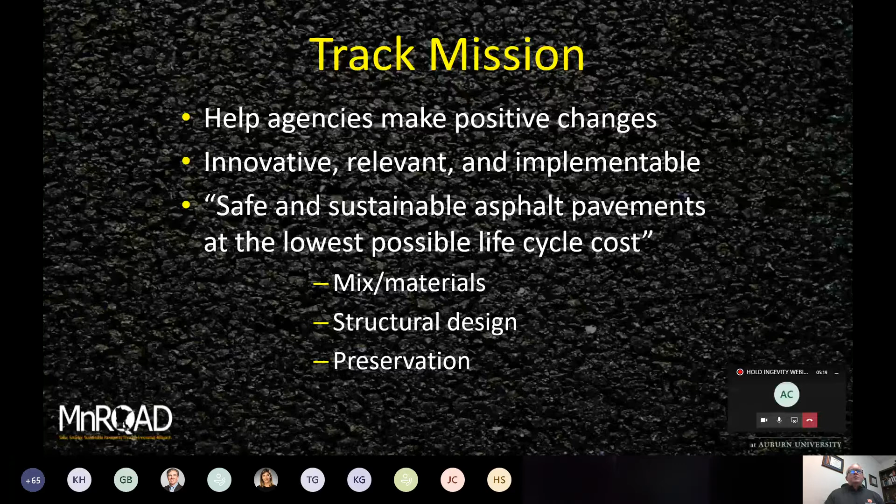That's an all-encompassing thing to say, but to summarize it better, we do research to determine what is the best combination of materials to put in each layer of the pavement structure. If you have the ideal materials in the mix and in the layers, then how much thickness do you need in order to minimize your life cycle cost? And then if you've got the right materials and the right structure, what do you need to do to preserve that? So you build a good house - what's the most cost-effective roof to keep on the house? That essentially is the three ways that we pursue safe and sustainable asphalt pavements at the lowest possible life cycle cost.

This message has resonated with many state DOTs. As Amy said, we've been doing this here at the track - we actually broke ground on the first track in 1998, so we've been doing this a very long time. We've grown from being a track that was primarily a Southeastern Conference track to have a much larger impact. You see a lot of northern states in this sponsor slide. We actually have 24 state DOTs that fund research here at the track in partnership with several different private sector clients.

One of the big reasons why you see a lot of northern states on there, like Wisconsin and Michigan and so forth, is because now we have a strategic partnership with MnROAD in several different areas that I'll go into here in just a minute. So we've grown through the years from 8 states to 24 states, and we're very grateful for our partnership with Minnesota Road Research Project that has made that possible.

Now, Minnesota does a different brand of pavement testing than we do here on the NCAT pavement test track. This type of research is called accelerated pavement testing, where we do accelerated damage. So the idea with this in our 3-year project cycles is to take the middle 2 years and compress a design lifetime of damage, which for us, that's 10 million equivalent single axle loadings, approximately 6 million heavy axle passes.

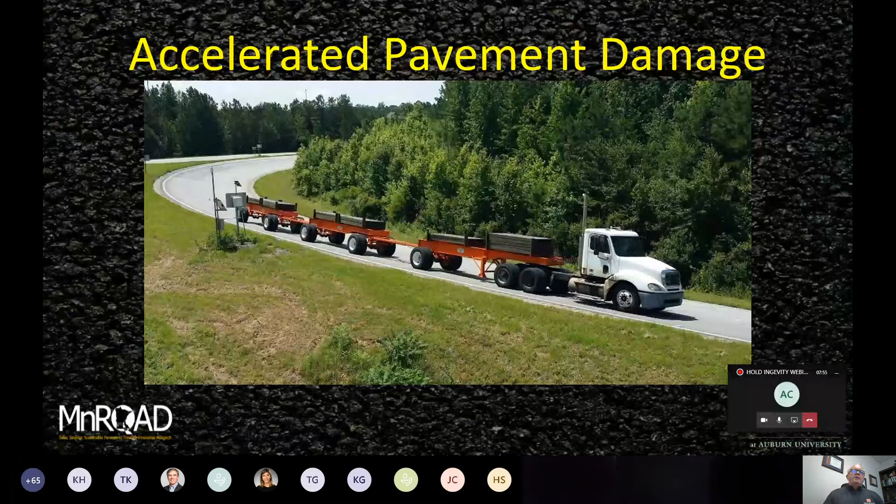The truck you see on this slide is going to do about 400 laps a day. That's what we target - about 200 laps in a primarily AM shift, and then 200 more laps in a PM shift. We run 5 of these trucks at a time. So when we don't have any drivers out and no mechanical problems like flat tires, we run 2,000 laps a day.

The track is 1.7 miles long. The straightaways are approximately a half a mile long. So if you do the math on that and throw in some downtime for drivers missing shifts and some mechanical problems, we run about 750,000 miles a year here on the track.

I think now we've driven over 9 million miles since we first started this research, since our first fleet operations back at the beginning of the 2000 research cycle, our inaugural research cycle. The 2018 track we're running right now is approaching 9 million ESALs, and this is the 7th research cycle. In total, we've done about 69 million ESALs on the track since we started this research, and we actually have 2 test sections still on the track that were installed when we built that first research cycle.

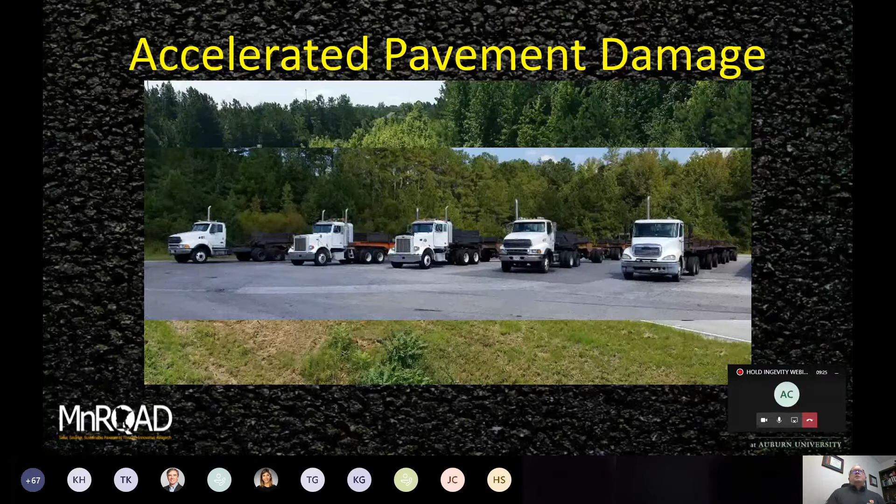So a lot of really successful pavement performance on the track, and a lot of good research for state DOTs with essential cooperation from industry, from material suppliers and equipment manufacturers, and from contractors. We're very proud of that.

Every week we park our trucks and go out on Mondays and do very detailed pavement condition assessments. Here's an example of the type of crack map data that we collect.

This is a big deal to me personally, because at one time with Alabama DOT I worked in research, and it's very difficult to do research on open roadways because of all the confounding factors that can influence the outcomes of the studies. On the test track, the neat thing is all those confounding factors are very controlled. And we can park the trucks and go out and collect this kind of data in a very safe way that doesn't put any of our personnel at risk.

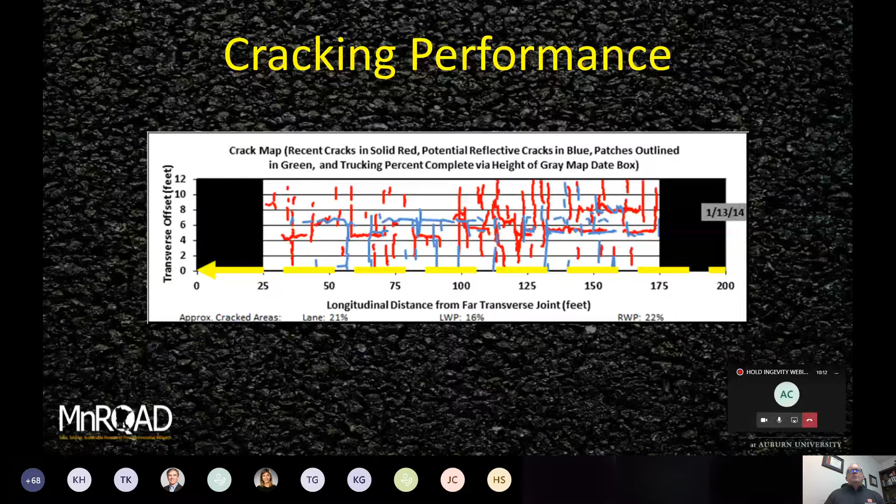So this is just an example of the type of work we've done in the past, where all of the recycle-focused sections outperformed the all-virgin control. We also learned a lot about the need for tack and adjusting what was a specification-ideal rate that we shot in the initial construction of that test section. We actually had to double that rate because of the various layers we had built in this relatively thin pavement.

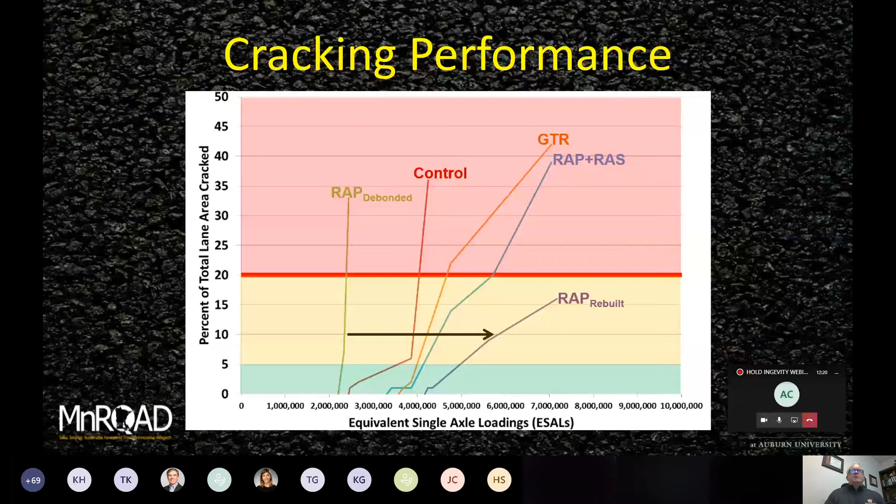So I wanted to give you a feel for what we're studying in 2018 in the current research cycle, and then transition from that with the sections that are going to stay in place for the next cycle, and end up with a focus on the 2021 track that we're going to be building next summer.

In the current research cycle, we have a partnership with the Minnesota Road Research Project. It's a two-part partnership where we're doing research with mix performance testing, specifically cracking tests, fatigue cracking down south, and thermal cracking up north, and then pavement preservation. It's a two-way partnership where they're our subcontractor in the cracking test work, and we're their subcontractor in the preservation experiment, noting that Dr. Adriana Vargas is the PI in preservation.

So the whole objective of the mix performance testing is which tests do the best job in predicting cracking. And we're talking about near surface fatigue cracking down here in our experiment, and then thermal cracking up north at the MnROAD test facility on the mainline bypass.

This is really important because we need to know how to improve balanced mix design outcomes. We've been volumetrically optimizing our mixes for decades, with a long history of success, primarily when we were using all virgin materials. That's not practical — you can't always build with virgin materials. We have to be sustainable with our industry. Our product with asphalt pavements is 100% recyclable, and when you want to use higher percentages of reclaimed and recycled materials, you really need to know how to assess that in the laboratory.

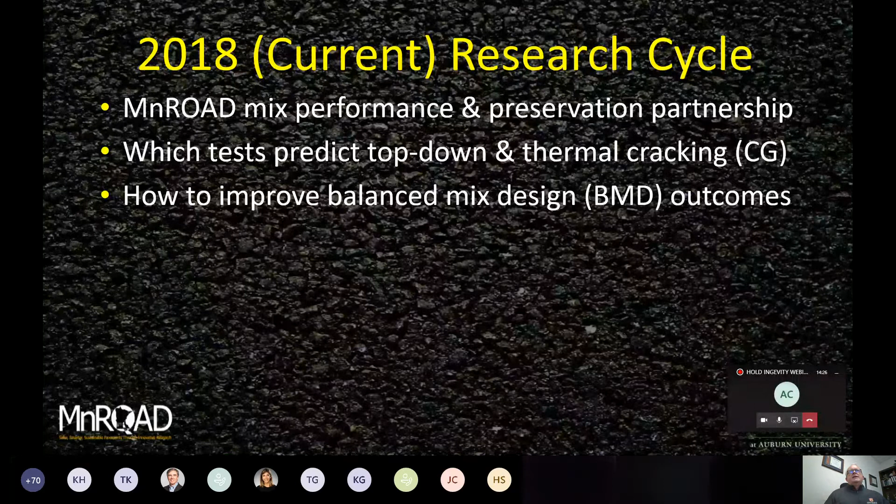That's important for state agencies in order to implement sustainability, but also know that taxpayers are going to get the right kind of value for the investment being made in our roadways. And then contractors need a BMD framework that they can complete their designs inside and build their roadways inside. Part of a BMD framework is mix design approval, but then also construction quality testing.

When we're approving mix designs, there are things we want to look at that we don't have time to look at when we're actually building a roadway, but we need rapid turnaround tests when we're building a roadway so that contractors know if they're complying with the specification. And if they're not, what can they change fairly rapidly at the plant within the same day, within 3 or 4 hours, in order to maintain specification compliance.

A big part of balanced mix design practices or methodologies is what type of aging you're going to use with the mix. You can do short-term aging to simulate what happens when you run mix through an asphalt plant, but cracking performance changes as mix ages, typically over a 4 to 5 year time frame. So we need to assess short-term performance because that's how we're going to be running our quality control tests.

But agencies need to approve mix designs based on long-term benefits, and this is very important for recycling agents, because when you go into the laboratory and do long-term aging of mix, you see that some recycling agents sustain rheological benefits over a long period of time, and some others do not. So they're not all created the same, and it's in the best interest of agencies to consider the effect of long-term aging on the performance of recycling agents.

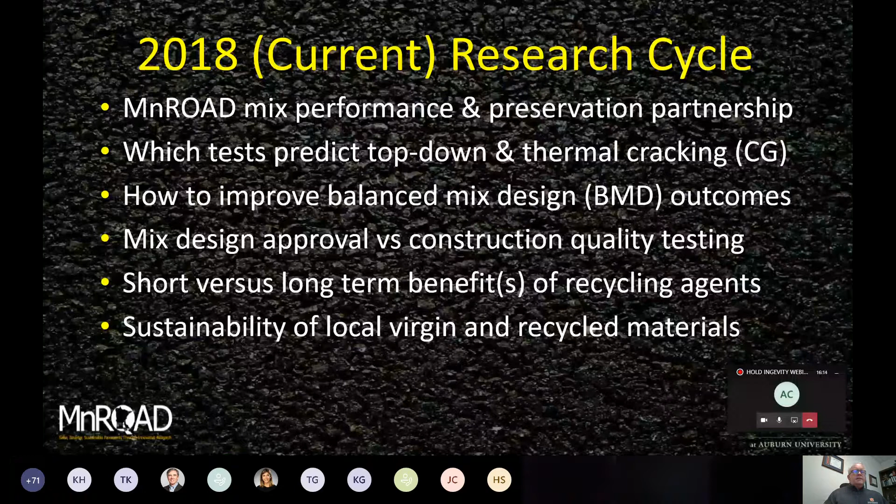Really, this is all about sustainability of our infrastructure. Sustainability for me — I tell people all the time — has three P's: people, planet, and profit. We really have to have all three legs on the sustainability stool in order to have a successful infrastructure program. And we need to make the most we can of local virgin materials and then reclaimed and recycled materials.

If you look at what's happening with quarries all over the country, in some states the number of active quarries is going down, and we're going to have agencies that are going to be really struggling to provide enough virgin material to build and maintain the roads in the manner that we need to provide infrastructure for our constituents.

So we need to smartly use reclaimed and recycled materials in combination with the best locally available virgin materials. Most of the time when we talk about local virgin materials, we're thinking in terms of optimizing recycle content, but a lot of the work we're doing on the track is aimed at maintaining surface friction, since many of our local aggregates, depending on your state jurisdiction, may have a polishing problem, and you only have a handful of sources in your state that provide really good friction numbers.

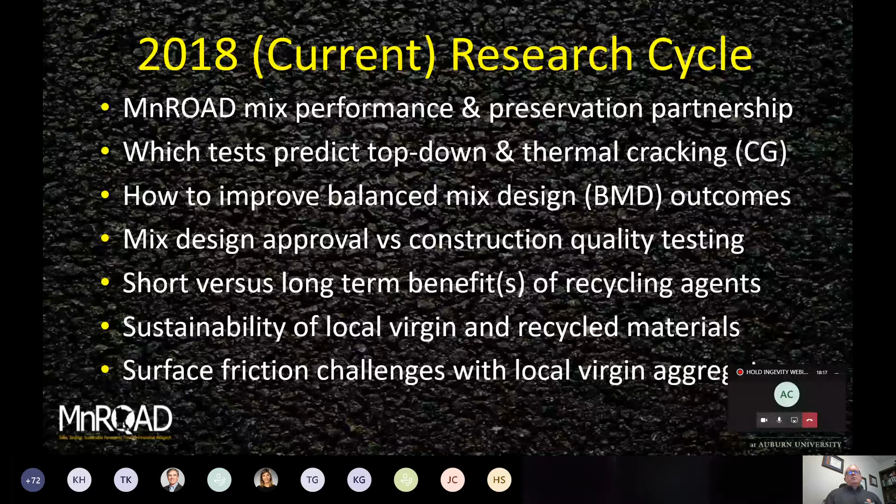So, spending quite a bit of time here talking about this cracking group experiment as part of the partnership we have with Minnesota. We have a list of consensus tests that the DOTs who funded this experiment said they want included. We looked at mix design type lab mix, lab compacted, with just plant simulation aging and then long-term critical aging, and also mix that we actually ran through our plant to build test sections on the NCAT pavement test track, which has gone through plant production aging and that we can do critical aging with.

So we've got 4 different categories of mix that we typically look at with each of these test procedures. The objective of the study is to see which of these match up with the differences we observe out on the NCAT pavement test track. It's a very practical, real world experiment.

The test sections we built for this are relatively thin, so they're bending a lot in response to passing legal loads in our triple trailer trains. But the base layer and binder layer were produced with very fatigue resistant, highly polymer modified binder, so they're not going to crack in the bottom or the middle. What's different about these test sections is the top 1.5 inches, which is made of many different types of mixes set up to have a broad range of expected cracking performance.

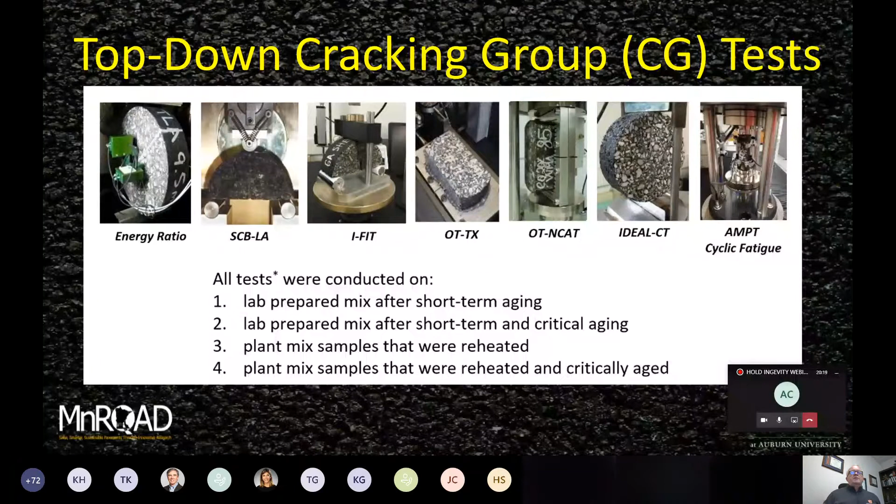So the goal of this study is to see which of these lab tests actually predict the differences we observe on the track. We're doing the same thing up in Minnesota for thermal cracking. It's a very practical experiment, and there's a great product that comes from this for states in the southern United States, the northern United States, or somewhere in the middle where you have both fatigue and thermal cracking considerations.

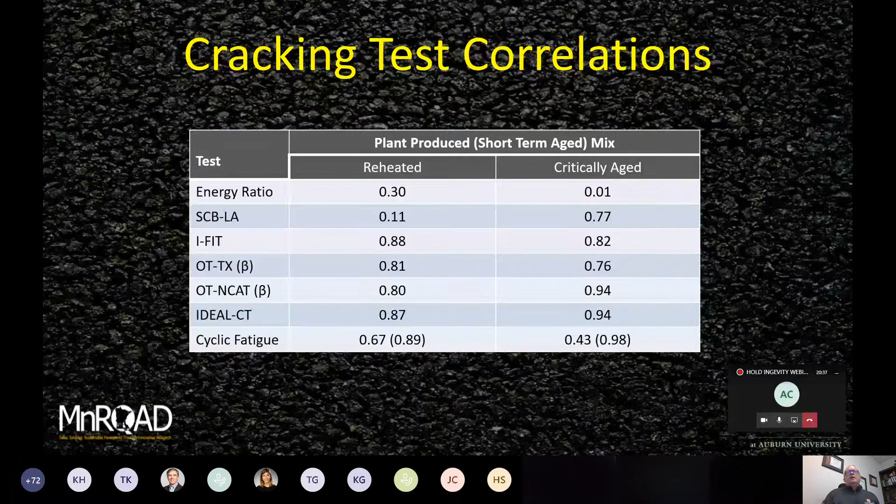So if you look at our correlations, after 8+ million ESALs, if you look at the cracking we're mapping on the track and correlate that with the outcomes of these experiments, what you see is that for states that need to approve mix designs, there's really high correlation, or coefficients of determination, between what we're measuring in the lab and what we're observing on the track. Everything I've highlighted in green represents potentially good options that state DOTs can use to approve contractors' mix designs for cracking performance.

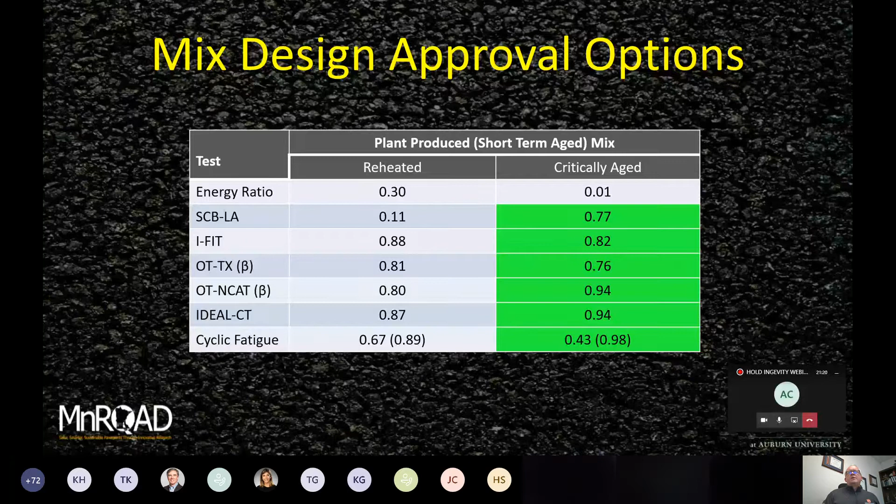Now, the other side of balanced mix design is rutting performance, but we have a lot of really good tools to assess rutting performance of mixes. Our big challenge is cracking performance. So everything I've shaded in green is a reasonable choice to assess and approve a contractor's mix design.

The ideal CT test is a very quick test, and you can turn results around in 3 to 4 hours. So when we do construction or maintenance work on the track, we always test drive ideal CT testing and hot ideal CT testing as a potential quality control tool. I've become more and more convinced over time that this is a great tool for agencies to consider.

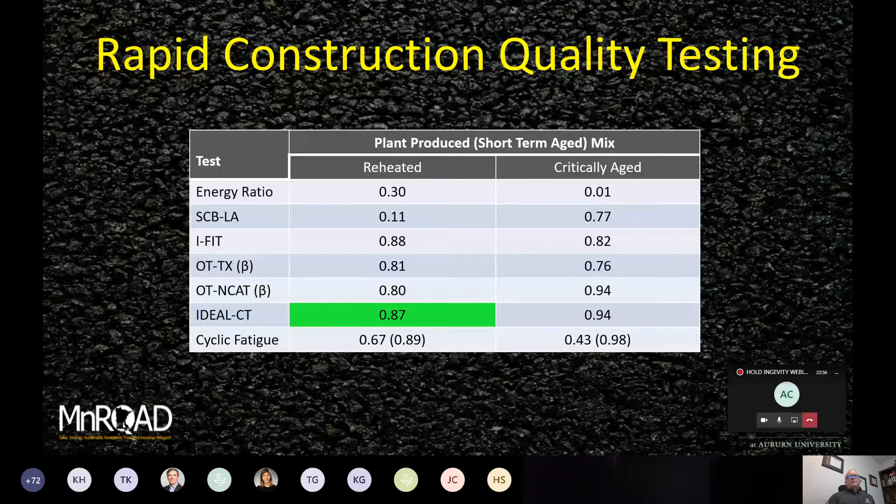For assessing the quality of produced mix. For mix design approval, you've got a lot of options for construction quality testing, where you need 3 to 4 hours of turnaround between the time you pull a sample and the time you get a number that can be compared to specification compliance. In my opinion, that's a short list, and it's ideal CT testing that correlates well with what we see on the track. That's without any kind of critical aging - that's just with plant aging.

So then what happens when you take that plant mix that you can test rapidly during construction, and then subject it to critical aging? What's the relationship between just plant aged material and the additional critically aged material? For us, critical aging is 8 hours of aging loose mix in a pan at 275 degrees Fahrenheit, and we know chemically that this induces a change in the mix that is chemically very similar to what happens with age hardening and oxidation on a roadway for 4 to 5 years.

That's on the NCAT track, the southern half of our experiment. If you look at the northern half of the experiment, these are mixes that we built at the MnROAD test facility. We placed these mixes on the NCAT track in 2015, and on the MnROAD mainline bypass in 2016, and we've been monitoring cracking performance on these ever since under the traffic levels that we see. At MnROAD, the critically aged mix is about 45% of just the plant aged mix.

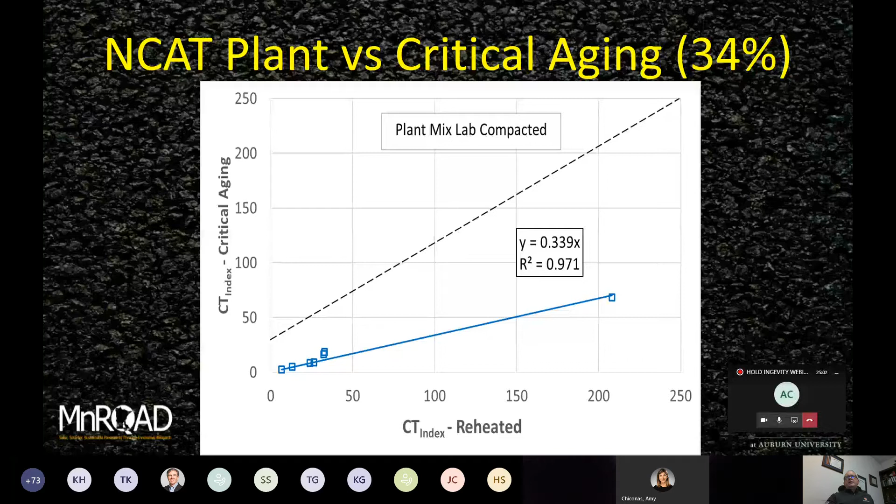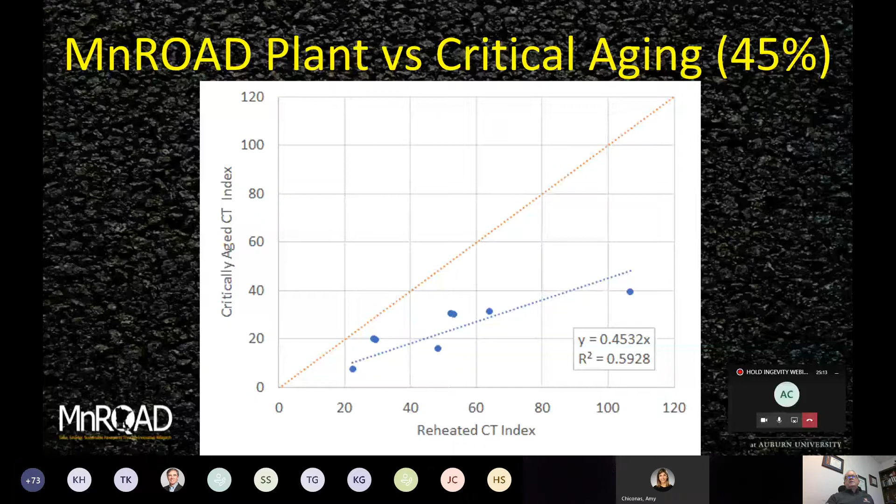So again, regrouping a little bit here: at NCAT, it's about 34%. At MnROAD, it's about 45%. You've got different binders, different RAP, a lot of different things that are affecting this, but it's kind of interesting to see how that changed.

This is data from another experiment that we did, for a state DOT where we tested some of their mix on active state projects. What we saw here was that critically aged mix was about 57% of just the plant aged material. So I think the takeaway from this is that the quality of the residual binder that's in the RAP plays into this, and also the virgin binder grade that's added to the mix when it's produced plays into that. So you're going to get a different reduction in ideal CT as a result of critical aging, depending on where the RAP comes from, the state the mix is being produced in, and whether or not you include recycling agents, and how well those recycling agents stand up to the aging process.

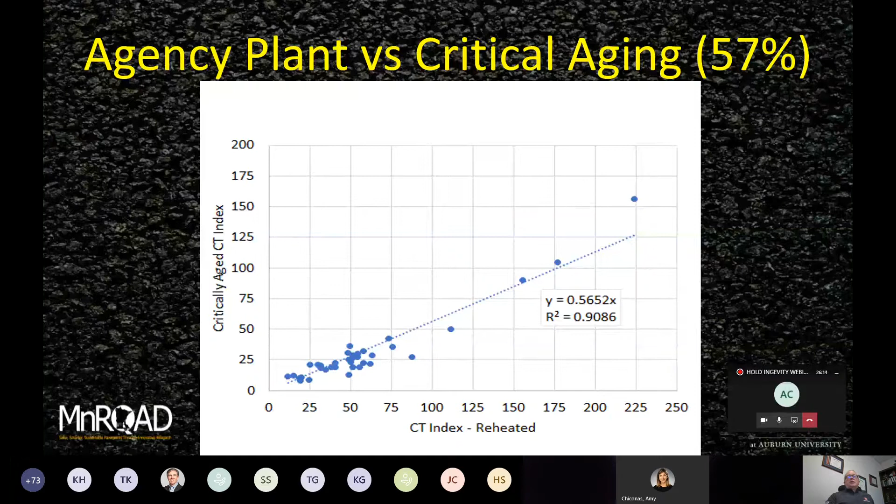So there's a lot for us to think about here, but to put all this together and view it through the lens of what we've seen here at NCAT - based on our ideal CT numbers with and without critical aging in the mix design, and what we actually run through the plant - these are some possible CT index criteria for a state like Alabama. I'm suggesting these numbers, I'm not recommending them to any agency, but I think it's a starting point for the discussion of how CT index or ideal CT testing can be used to control the quality of our mix designs, as well as the quality of mix that's produced from those designs and placed on our roadways.

So here what you see is you go from plant aging during the mix design process, possibly specifying an ideal CT index of 50. That number goes down when you critically age it, so something probably 30 or better would be an arguable starting point.

When you run mix through the plant, that 50 might drop to a 40, and then when you critically age that, it might drop to a 20. Again, this is based on what we've observed on the track.

If you applied these numbers, really from our research here on the NCAT pavement test track, they more or less represent a break point between a mix that's a really good performing mix, one that cracks later in its life, versus a mix that cracks earlier in its life.

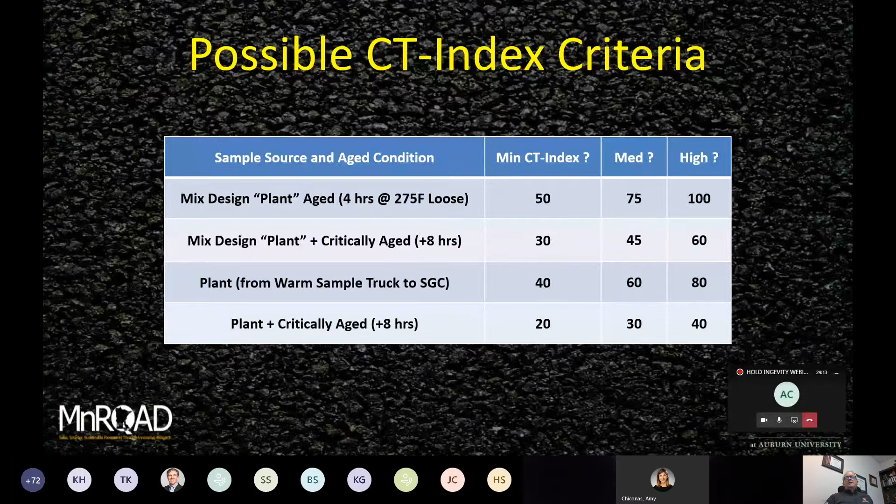We also do a lot of work here in pavement preservation, and our pavement preservation work is actually impacted by our work with balanced mix design, because the thin lays we've been placing in our preservation experiment going all the way back to 2015 have all been BMD thin lays, where we try to balance rutting performance and cracking performance, while still utilizing the best use of RAP and in some cases RAS on these test sections.

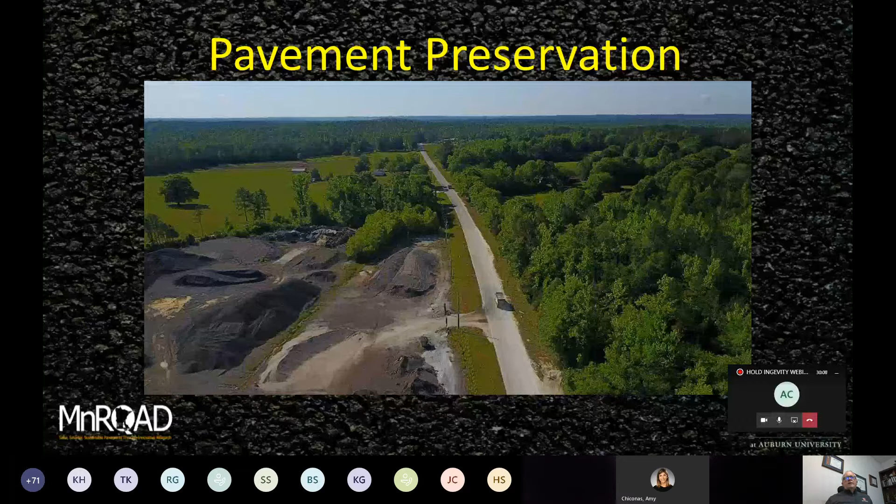This is an aerial shot, a drone shot from Lee Road 159, and there are hot mix thin lay treatments, emulsion treatments of different types, and combinations of those. So we've got fog seals, chip seals, microsurface, cape seals, and thin lays, going all the way from virgin thin lays to 50% fine fractionated RAP thin lays.

On these test sections, the dash lines in this plot represent cracking performance without a treatment, based on our control sections, and the solid lines tell us how these sections are behaving with treatments. For example, this is a single layer microsurface, and if you look at when that pavement surface is in fair condition, the gap between the solid line and the dash line is the benefit you get in performance from a single layer microsurface.

If you look at that zone of this plot, the fair and the good surface solid lines line up really well with each other, but when you put a microsurface on a pavement that's 20% or more of the total lane area cracked, performance is significantly negatively impacted by that.

So we are developing these standalone performance curves for different installations of microsurface, ranging from single layer with and without crack sealing, to double layer, cape seals, high polymer, fibers, and all kinds of different things. There's a treasure trove of information in preservation, and you can actually download these cracking curves from the project website, which is pavetrack.com, PAVETRACK. You can also get to it from NCAT.us.

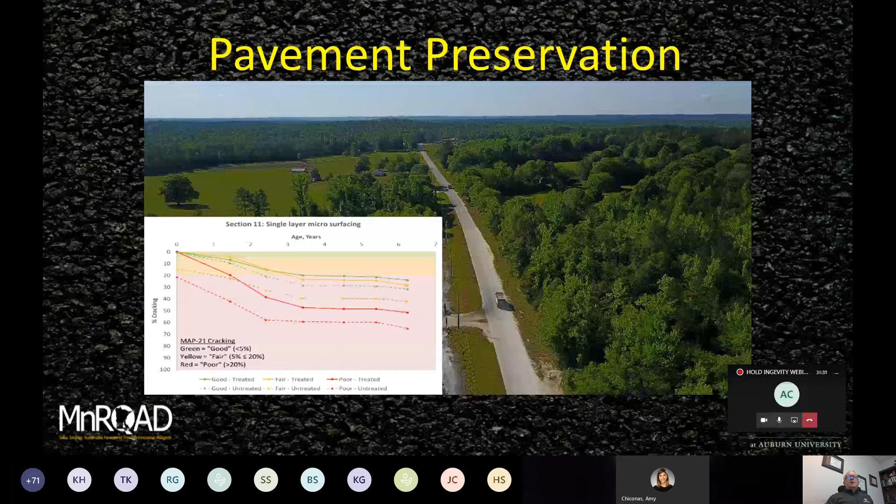So that's pavement preservation. Of course, we want to do preservation when we don't have deep distresses in a pavement, but we also do research on the track where we do have in place cracking, and we can't go all the way down to the bottom of the cracking to do a mill and inlay to get a new surface down.

So for Georgia DOT, we're looking at different ways that we can prevent reflective cracking. As you look at this slide, there are 2 plant mix options closest to you, 2 chip seals in the middle, and 2 geosynthetics on the far end.

The plant mix options, this darker one is an Arizona rubber surface mix, very fatigue resistant, and we're using that to prevent reflective cracking. This is a plant produced open graded interlayer, much cheaper than the Arizona rubber with a non-polymer binder. And then of course we're putting the same dense mix on top of all of these.

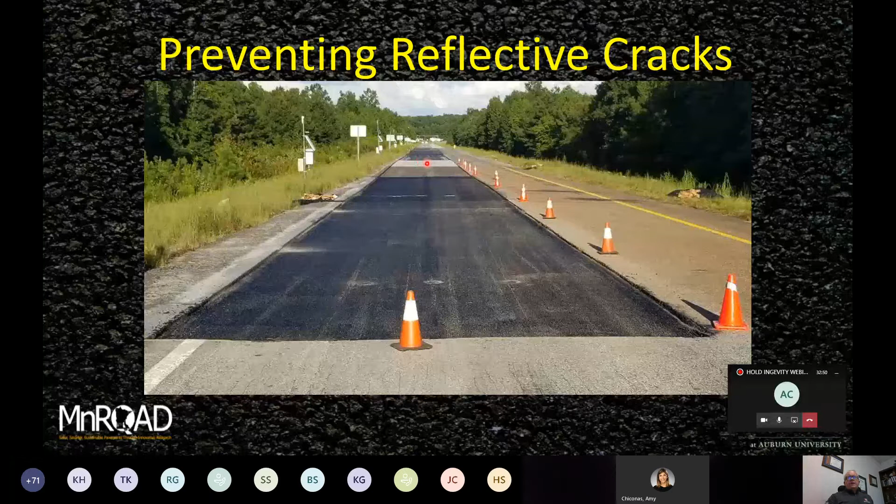The 2 chip seals, this darker one is a coarse fractionated RAP chip, and the one right before it is a virgin aggregate chip. And then if you look at the opposite end of the study, you've got a fabric here, and then at the far end it's actually a geogrid and a fabric in combination.

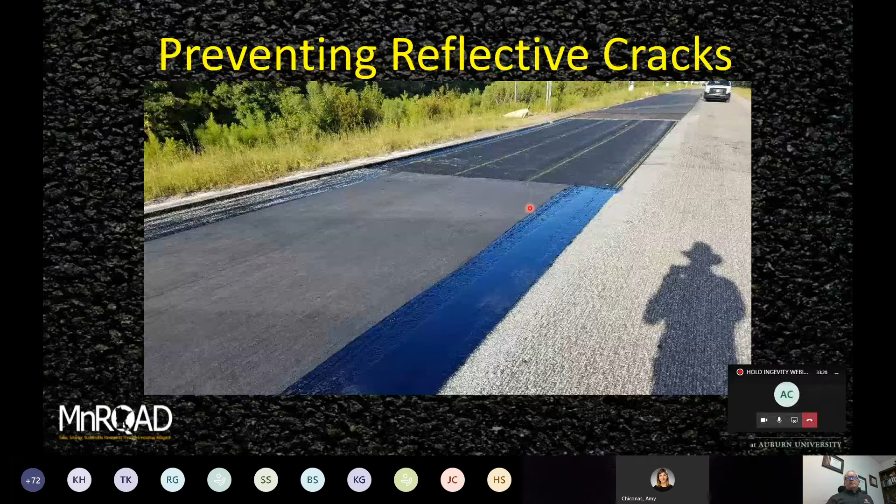So Georgia DOT is looking at these 6 alternatives: 2 plant mix, 2 emulsion chips, and 2 geosynthetics. There was cracking already in this pavement that was saw cut, so we knew exactly where it was. We're just monitoring these pavements for the recurrence of reflective cracking. So stay tuned to the outcome of that experiment.

But when pavements are now completely failed - so we've talked about preservation and preventing reflective cracking when we can't go all the way down and take care of the underlying cracks - what about when the pavement is completely failed?

Well, for South Carolina DOT, we did a full depth rapid rebuild where we're putting 8 inches of warm mix asphalt down in a single pass. You see some of our strain gauges, our high-speed response instrumentation right here, so we can see how this pavement is responding to passing loads.

But we did this successfully - put this down over 8 inches in a single pass, and this is something South Carolina is doing in failed interstate pavements and truck lanes, so that they don't have a big drop off as a result of staged construction.

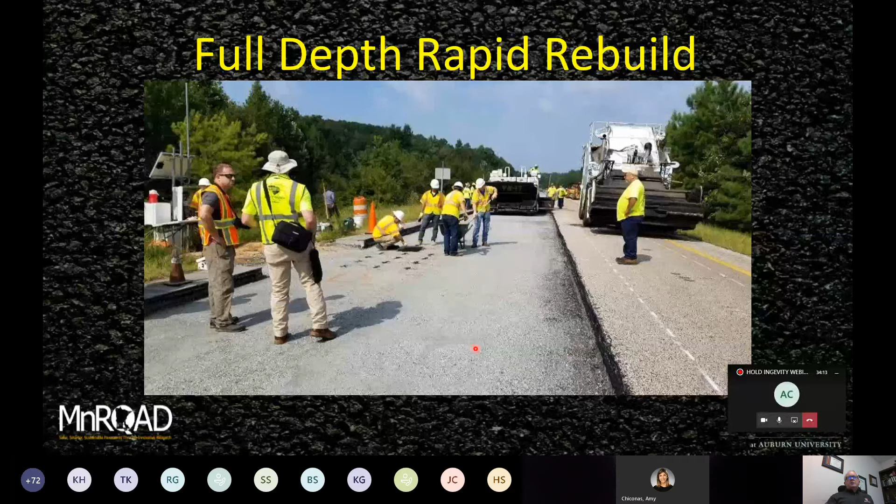Our experience with this was that we did need to come back and diamond grind it. This was not unexpected because South Carolina has seen this. But as contractors in South Carolina get better at doing this really deep single lift placement of asphalt pavement, they're getting better and better with their smoothness numbers. And my understanding is now they're doing a lot of work that doesn't require any diamond grinding.

This is a huge deal because we're all taught that the thickness to nominal maximum aggregate size ratio needs to be 3 to 4. Well, what we found was that with a half inch nominal maximum aggregate size mix, we went all the way up to an 8-inch lift, and we cut cores and did density profiles, and we had excellent compaction in every layer. And we did run this as warm mix asphalt as well. So a very, very successful experiment.

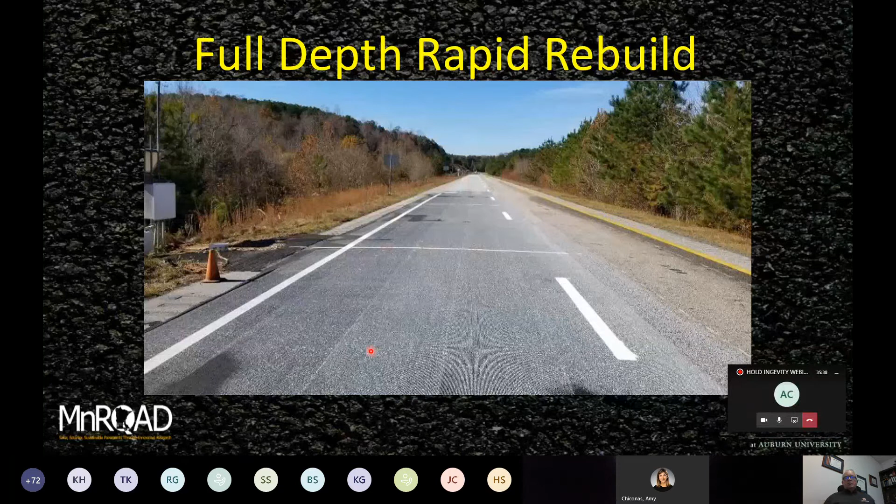Now, what all these have in common on the 2018 track - the reason I'm focusing on it now - is we do anticipate continuing traffic on all this stuff: preservation, the interlayers, crack prevention interlayers, and the full depth rapid rebuild. Those are going to be continuations in our next research cycle, which will start next summer, the 2021 track, and that's part of agencies coming in and supporting these standalone experiments for each research cycle.

So that's my segue to the next track. All that stuff I just talked about, yeah, it's in the current research cycle, but it's going to continue to be in place for the next research cycle in 2021. We're continuing the MnROAD partnership for mix performance and for preservation.

The mix performance work that we're going to do with MnROAD in the 2021 track is to quantify the impact of, quote, premium mix additives on pavement life. The shorthand for this is the additive group experiment, or the AG study, AG experiment. The product from this is going to be 93 design guide layer coefficients for states that do empirical pavement designs, and then calibrated models for states using the Pavement ME system to design their pavements.

So I'm mentioning this now because we're doing what we're referring to as phase 1 testing this fall, the fall of 2020, where we're doing balanced mix design work, mix performance testing and modeling of many different, quote, premium mix additives, so that we can present all those results to states that are sponsoring this study.

All the states that are pitching in cooperatively to fund this study, from all the phase 1 studies that we're doing, the states are going to choose which products they want us to include in the track build that we'll put down next summer. We'll build sections here in 2021, and then our expectation is that in 2022, with the 1-year offset, we'll put test sections down at the MnROAD test facility so we can look at the effect of their extreme thermal environment on all these same types of premium mix additives.

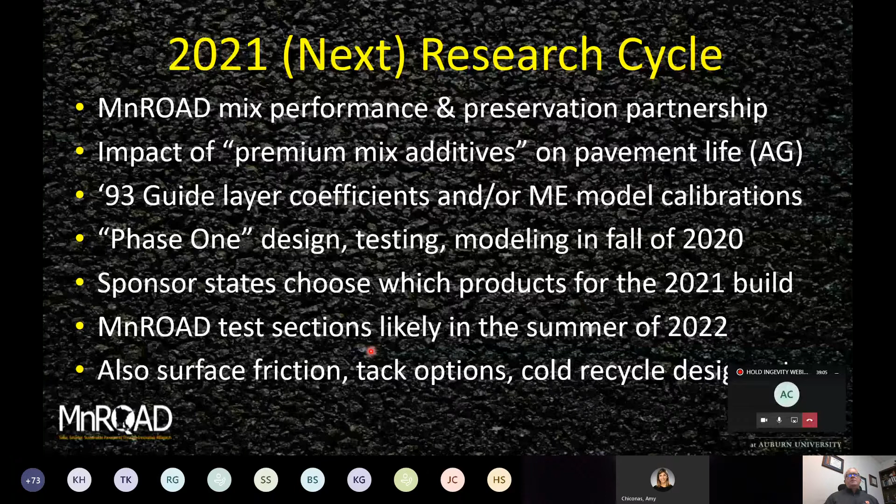So we always talk about getting good life cycle performance out of our pavements. But if you build a pavement that lasts forever and it's not safe for people to drive on, then you really haven't done anything. So we have to consider safety as a very important part of sustainable pavements, and that's the reason why I presented the mission statement the way that I did in that early slide.

So what this experiment is going to look like, this is kind of a schematic of it. The long name for the study is Sustainable and Resilient Pavement Technologies, shorthand SRPT. We're going to have a control section that's 5 inches thick on our base and our subgrade.

And we know that at 5 inches thick, a pavement should last about 6 months here under accelerated traffic at our test facility. It's going to fail rapidly. That is the history that we have with these types of installations.

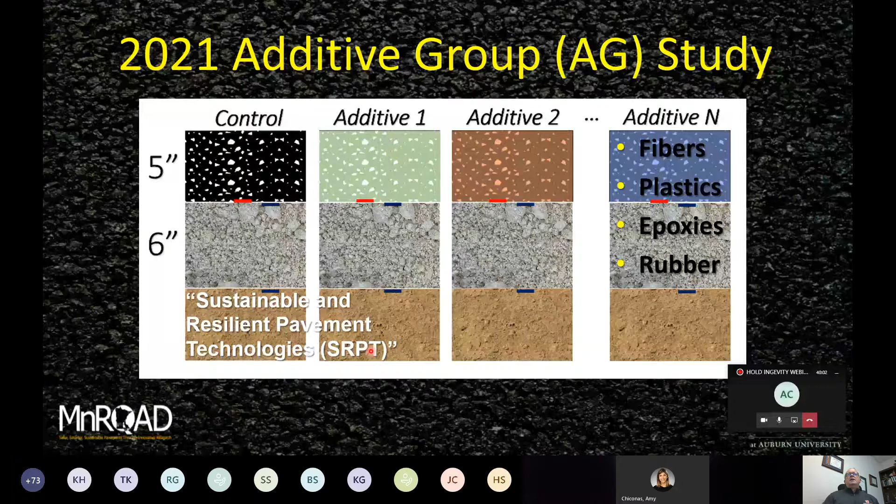So what we're going to do in the various treatment sections is build similar 5-inch pavements, but we're going to include fibers, some aramid fibers, possibly some other types of fibers, plastics of different types, maybe some epoxies, some recycled ground tire rubber type products, and then anything else that comes up this fall where a state says, hey, we want to take a look at this, or a vendor comes to us and says, hey, we want to fund one of these $20,000 small phase 1 experiments so we can generate modeling data that the states can consider to possibly include us in this experiment.

Now for the future, I told y'all that the main product of this research is going to be a layer coefficient that you can use for pavement that's got recycled tire rubber in it, or for pavement that's got aramid fibers in it.

But what about future products? We don't want to have to build test sections every time somebody comes up with a creative product that is intended to extend the life of pavements in a sustainable way. So the other big product of this research is going to be a laboratory framework that state agencies can use to subject products to predict performance.

So it's going to be not just a cracking performance system like what we had in the last cycle. It's going to be a testing and modeling effort, so that a state says, okay, well, if I specify and invest in aramid fibers, instead of using my book value of layer coefficient or my conventional dense graded ME model, what effect am I getting from the fibers? How is it extending performance? Is it extending performance? And if it is, is it going to be worth the extra money that I spend on it? So that is the scope of this additive group experiment that we're building next summer for the NCAT pavement test track.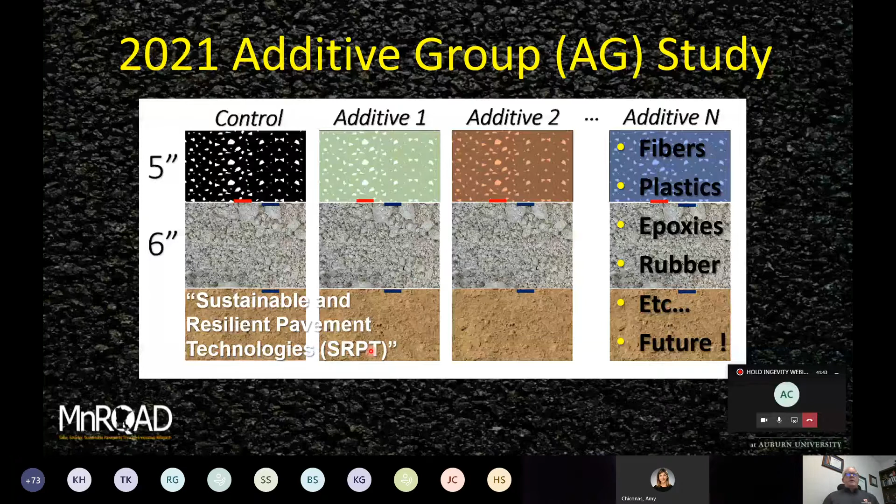So key takeaways from all of this: NCAT stands in the gap for industry and agencies, and we're that neutral party that industry likes to rely on for innovation, and agencies like to rely on for technical support to navigate that change process.

The nice thing about what we do is the track is ground truth for pavement performance. We're not using super loading to fail our pavements because that would produce confounded results due to high strain magnitude events. We're using legal loads. We go to great lengths to have good construction quality so that doesn't confound outcomes. We know exactly how many axles have been applied. Climate's the same for everything, so it's very, very controlled.

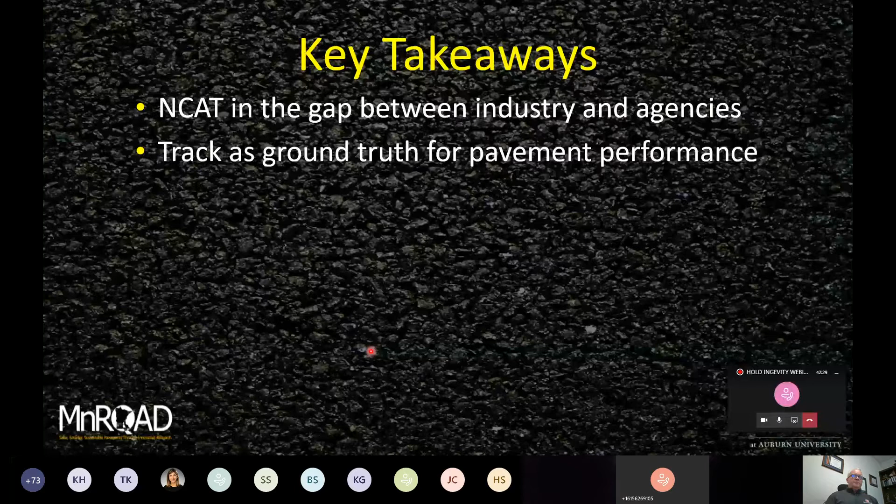We're still engaged in this MnROAD partnership. We don't really see an end to that because of the nationwide impact that it has.

We really believe that when agencies approve mix designs, they need to use plant and critical aging to approve their mix designs. But when we're producing mix, we have to have a quick test where it's not going to be days or weeks before a contractor knows if a mix is good or not. They need rapid turnaround, so within the same day they can make a change in production to maintain specification compliance.

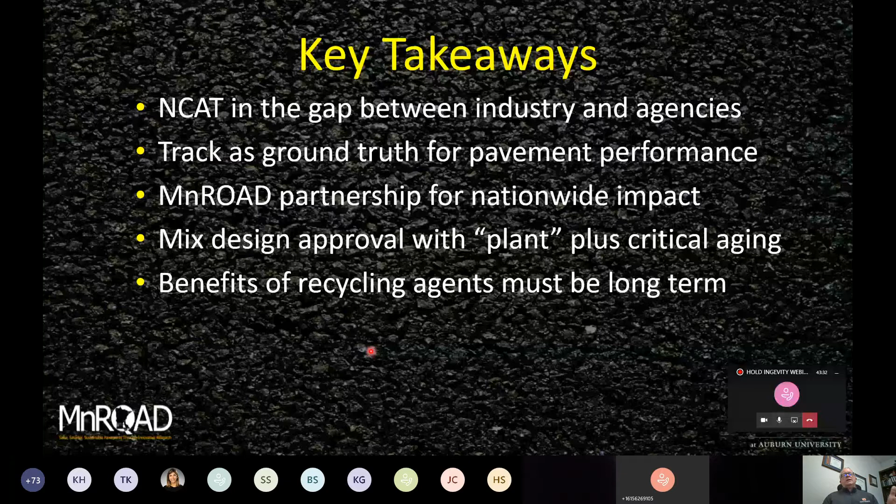We have to know that the benefit of recycling agents is long term. If you just put a softener in a mix that's, for example, a high RAP content mix—if you just soften the aged binder in the RAP for a short period of time, and then it age hardens very rapidly again, you're not going to get good cracking performance as you approach that 4 to 5 year mark. We have to know those benefits are sustained, and that quick turnaround is essential.

I know some states that have done pilot projects with balanced mix design, and they're using tests that take weeks to get numbers back. That's not viable for implementation.

If I'm a contractor and I pull a sample at 7 o'clock, I need to know before lunch: am I good on my cracking performance test, or do I need to use more recycling agent or more virgin binder or less RAP or reproportion my cold feed bins? What do I need to do to get back in compliance? So that quick turnaround is very, very important.

And then, of course, in this cycle we're planning right now, the key is: what is the performance impact of premium mix additives? If you use some of these materials and pay money to specify them in mix, or if a contractor chooses to use some of these materials to satisfy BMD requirements, then is it going to pay for itself in the cost per ton impact and the operational impact at the plant? Is it going to be worth it?

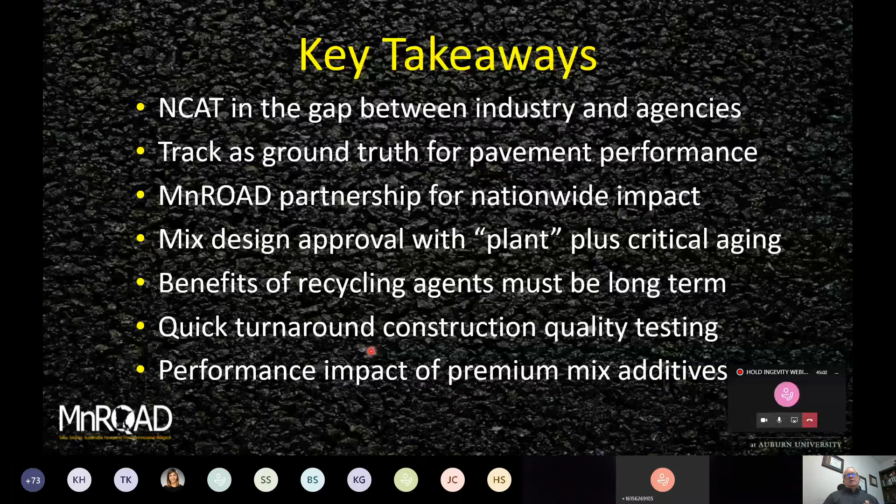Well, we're going to be able to answer that question with this next research cycle and develop a framework that's kind of an NTPEP style evaluation process for future additives as they emerge out there years from now.

So a big part of what we do, as many of y'all know, is support for implementation, and we will be hosting our end of cycle conference for the 2018 track next April.

We're have growing optimism that we will have turned a good corner, at least with the pandemic limitations. So where we ordinarily expect to have 250 plus people at this conference, the reality is you'll probably still have some state agencies dealing with travel limitations. So where we ordinarily have 250 people here and maybe 40 online, it might be a 50-50 split.

But we are aggressively planning for a physical meeting, and it's going to be April the 20th through the 22nd here in Auburn, and we'll do tours of the track and get boots on the ground to look at the various test sections. And of course, the focus of this will always be implementation.

So we would extend an invitation to all the participants in this meeting today to our track conference next spring.